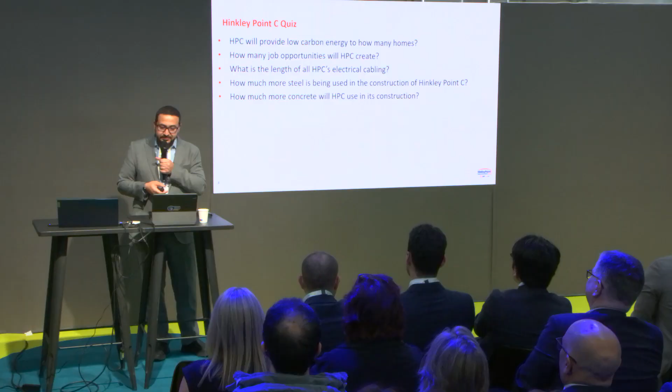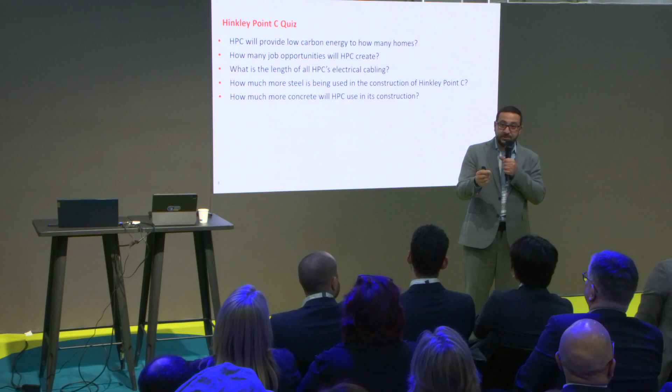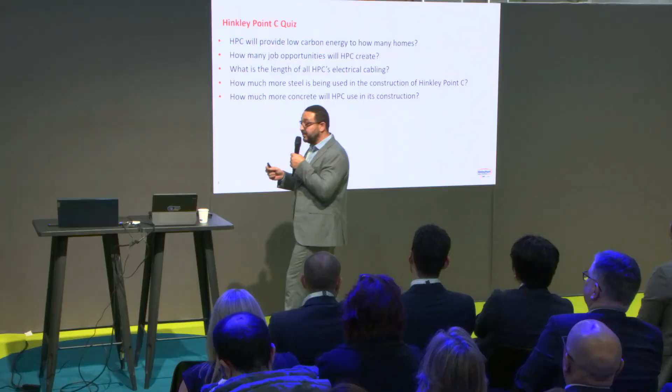And how much more steel is used at Hinkley Point C compared to Flamanville? Anyone want to guess, in percentage? 20% - good guess, close. Maybe while you're thinking I'll explain the reason - with the different regulator, there's different requirements in terms of reinforcement and some slight design changes. In fact, I would classify Hinkley Point C as a first of a kind because there's about 25% difference in design. But the steel, your answer was 20. Any other takers? So 20 was the first answer. 25 is much closer, so it's 35%.

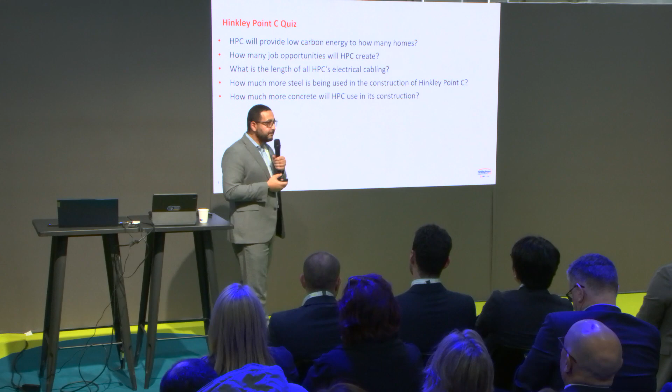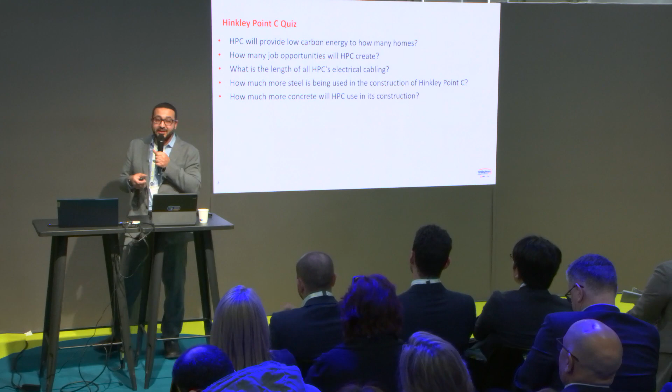35% - so more steel. And how much more concrete will HPC use in construction? Percent will be fine, anyone know? 50%? It's a bit lower - it's about 24%. Thank you for engaging. So it is different, isn't it - Hinkley Point C is different. And different comes with some challenges, but some huge opportunities as well.

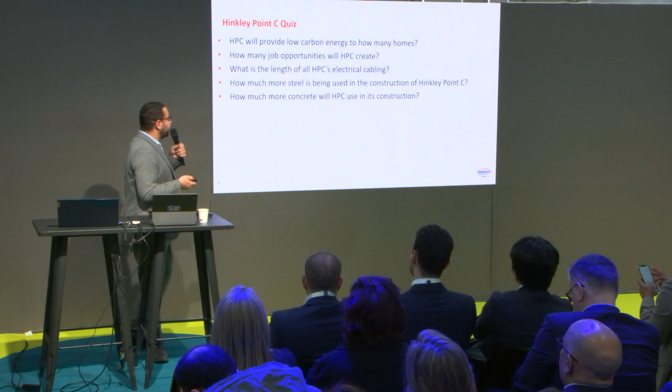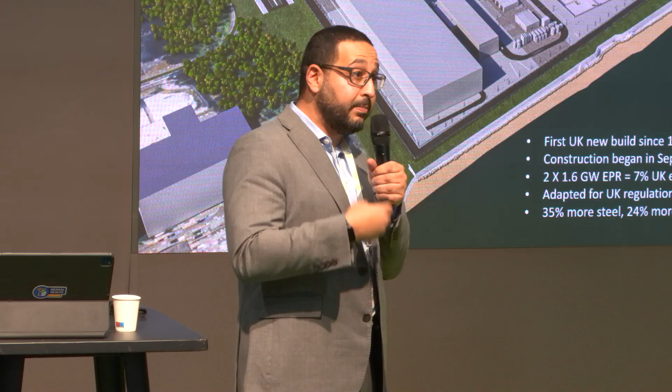Okay, so this is what Hinkley Point C will look like. I'm very much looking forward to it when it's an operational power station, where I feel a bit more comfortable because that's my experience, that's my background, and we'll be making electricity and sending it out. So beautiful looking plant, and there'll be a nice walk here where I plan to walk with the team every now and then, get some fresh air. But it's a very long walk because Hinkley Point C is very big, much bigger than my old stations.

Okay, so construction began in 2016, but the first concrete was 2019, and it's 2 1.6 gigawatt EPRs. Will produce 7% of UK electricity. And you can see the answers on some of the questions. I would consider it a first of a kind as well.

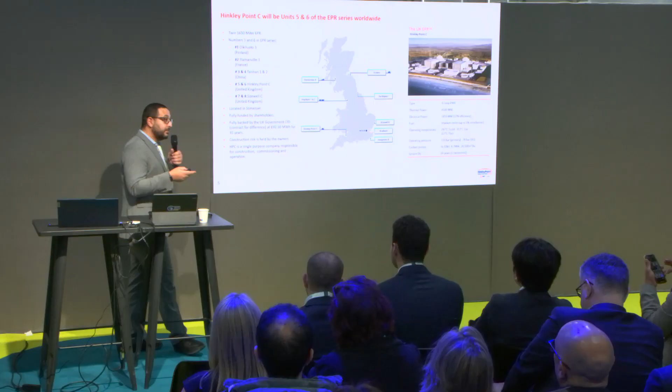Hinkley Point C, we consider it number 5 and 6 of the EPR family: Olkiluoto 3, Flamanville 3, and Taishan 1 and 2. It's hugely beneficial to come a bit later in that sequence, because we can take a lot of learning, but Hinkley Point C also has some differences. So lots of learning for us to take, but some things we're facing for the very first time as we build Hinkley Point C.

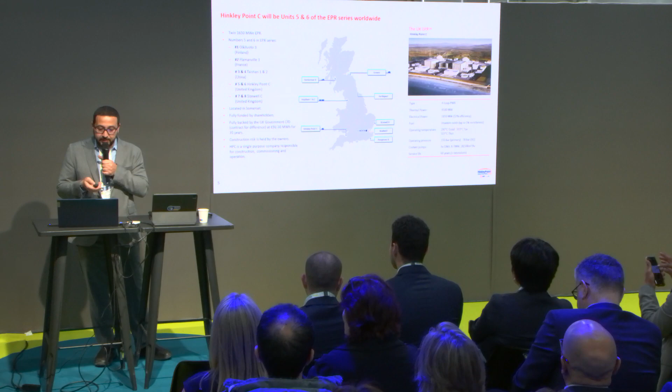I'm going to talk about the delivery model in a little while, but something about the way Hinkley Point C works. I joined Hinkley Point C two years ago from my previous roles. There are over 11,000 people there now, and so many suppliers and partners. We are essentially the customer, but we have to be a very intrusive customer, so we have to be involved in pretty much everything.

That can be quite challenging when you have different suppliers from all over the world with different standards, different ways of working. To be able to ensure there's a common standard, a common way of working, is very challenging. And that's why we created a delivery model, which I'll talk about.

When we embarked on Hinkley Point C in the UK, one of the things worth noting is the last power station built was Sizewell B, and that's the last time we built a power station when we had the infrastructure to build power stations. But since then, we've been quite quiet when it comes to nuclear new build, which means we didn't have, and in fact we are still developing, the capability to build and operate this large power station in the future.

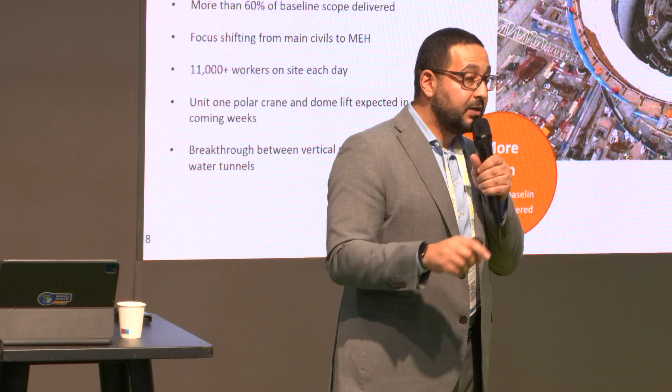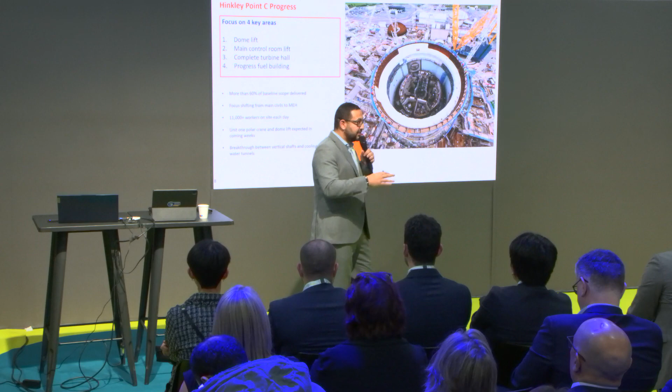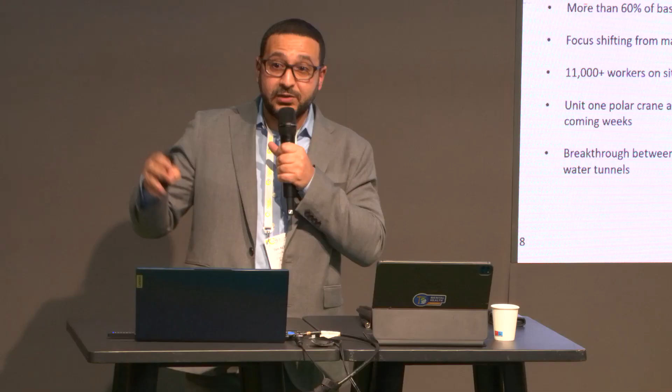The turbine hall - completing it is progressing well, but it won't be complete this year as was one of our targets. It'll be completed early next year, so it's progressing very well. It looks different now - you look at the turbine hall in Unit 1 and you can see a turbine hall. If you've been into operational stations, you can see the structure, the foundations, where the turbine's going to go, where all the motors and pumps are going to go - it looks real. We just have to put some cladding and covers on to finish the turbine hall and allow GE, General Electric, one of our main partners, to come in and progress the installation of the turbine hall. And progressing the fuel building is ongoing.

So today, what would you see? I mean, have any of you been to Hinkley Point C? Yes, that's why you know all the answers? Yeah, quite a few. Okay, some of you work there, I know you, so you don't have to raise your hands.

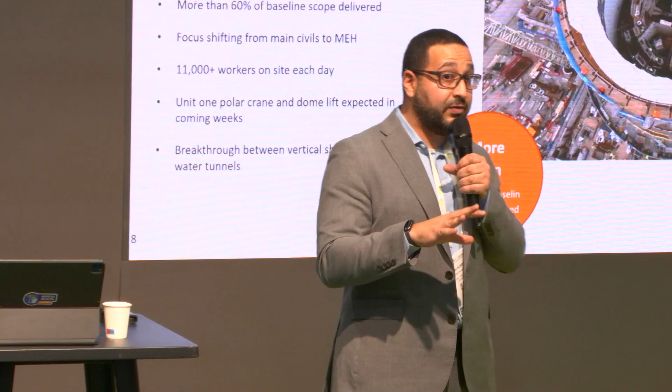So from today, what you would see is, out of the 11,000 people, about 6,000 are civils. So most of the work scope at the moment is civil work.

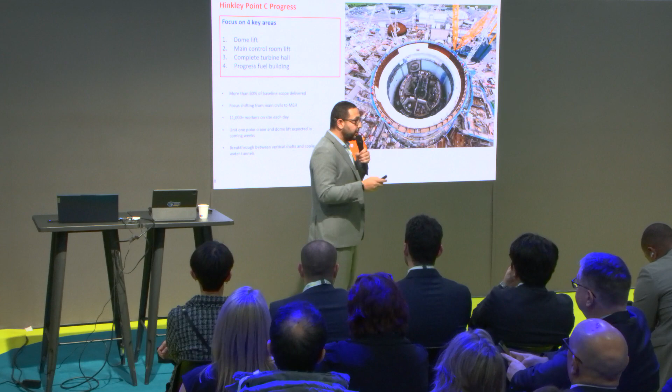So next year is a really interesting year, because there's going to be a shift from civil being the primary activity to the next phase: MEH, mechanical, electrical, HVAC. It's already happening, it's kicked off, but it's a very interesting time, and we've learned from the other EPRs that it's critical to get right.

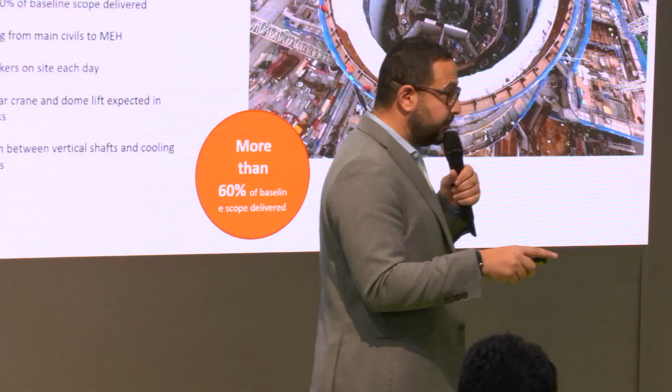How do MEH come and work while civils are still working? How do MEH install while some of my team will be commissioning? Who's in charge? Under which safety standards do we work? Who owns the risk assessment? There's a lot of questions.

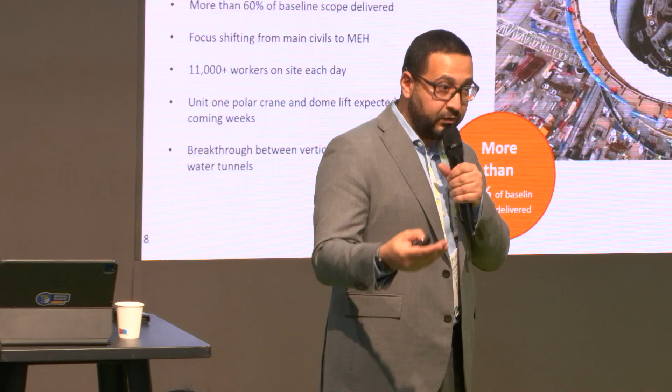Actually, we're very lucky that the other EPRs have shared very openly with us some of these challenges, and we've taken that on board in how we've written our processes. Now we have a very collaborative model, which I'll talk about in terms of how we deliver work.

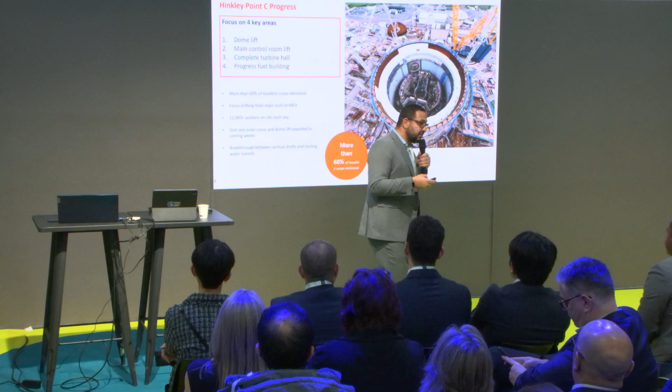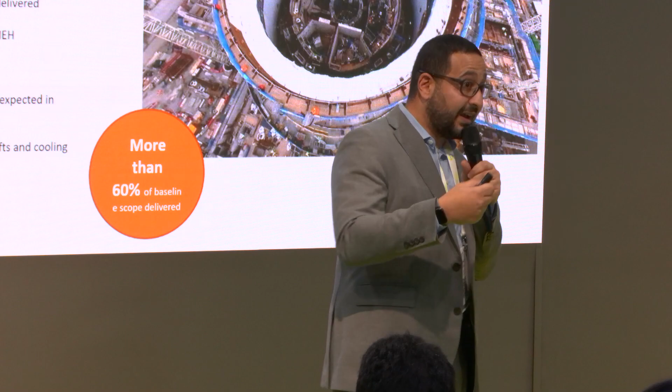So MEH will pick up quite heavily next year. We expect the number of people working on site to go up to about 12,500, which was not the original plan, but we have a lot of work to do, so we're increasing the number of people. We've been quite successful in attracting people from around the world, as well as developing people in Britain, so we're going to use that additional capability.

Okay, the polar crane I'm going to cover in a minute - I'll show you a picture of it. I walked it down last week. Before we put the dome on, we want to put the crane in from the top because it's very big.

If any of you have been to the EDF stand, you're able to use virtual reality - I did this morning to see Flamanville 3. When you do that you'll see the polar crane, it's huge. I was very keen to see it in position because the polar crane at Hinkley is in a big tent at the moment, being finalized before we lift it into the permanent location in the reactor. It's in a purpose-built tent that keeps it safe and preserved while we finish the bolts and fasteners before we lift it into final position.

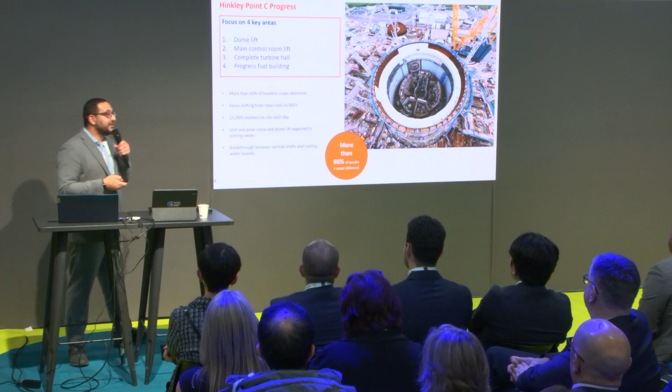Okay, I'm going to move us forward. So yes, the overall progress, we are 60% complete overall, and we have a very ambitious schedule, especially being the first of a kind.

But it's great for driving people to be creative and really consider that a lot of things won't work the first time. So we have to be ready and have the backup ready, just like we did with our quiz. That's what we're doing at Hinkley Point C. We're getting better at it. Are we perfect? Absolutely not.

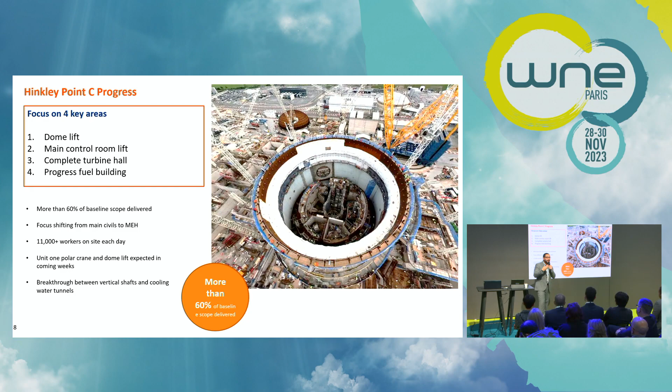Have we got some benefits? Yes, because we've had some really good operating experience from the other EPRs. Our 96-month schedule is what we're working to, but there are some challenges to that, is the truth, and we're working through them as best as we can to minimize any delays.

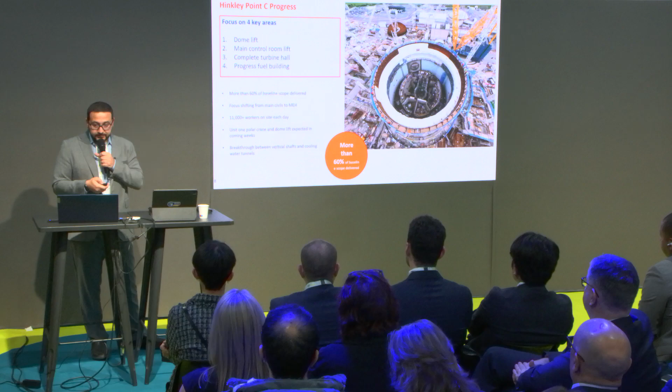Okay, I'm going to show you a video - let's hope the audio works okay. Are you ready? This is the latest video, it's a few months old, but you'll see the next one with the dome on probably in a couple of months. Things haven't changed at the top level too much.

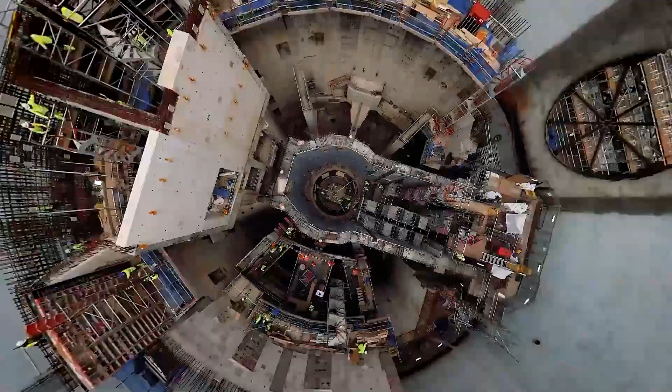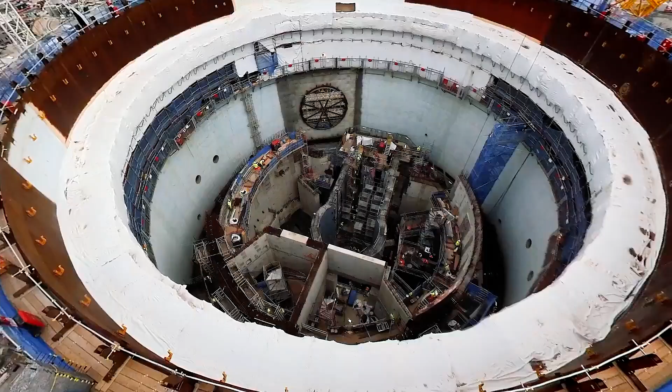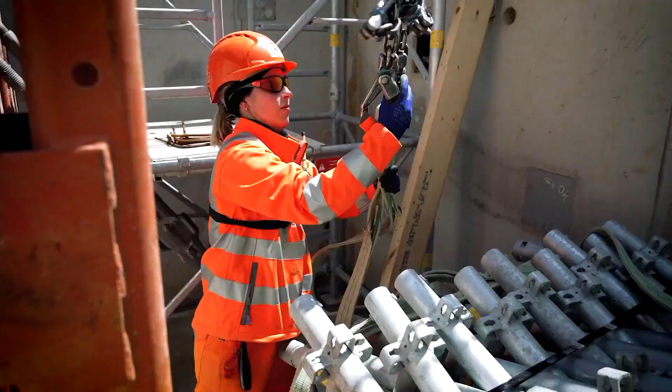Welcome to Hinkley Point C, where we're building Britain's first nuclear power station in more than 30 years. Night and day, it'll power 6 million homes and will be crucial in helping us achieve net zero and stronger energy security. Right now, we're busy working towards a really big milestone in the project's construction. Let's go and find out more.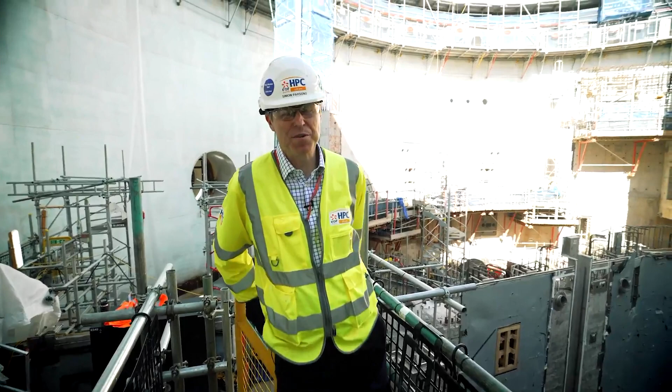Welcome to the heart of the first reactor building. The teams are getting ready to lift the 245-ton steel dome on top of the building. It will be a spectacular sight and a significant milestone for the project.

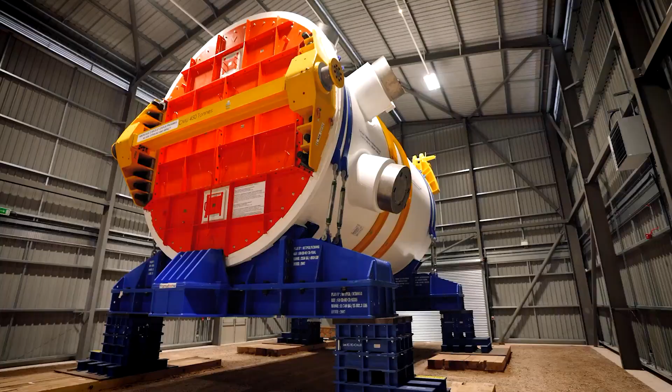Below me, we have installed the support ring, which will hold the reactor in place. The reactor arrived on site early this year and will be installed next year. You can see we poured the concrete around the big prefabricated pool, which will be home to the reactor for its operational life.

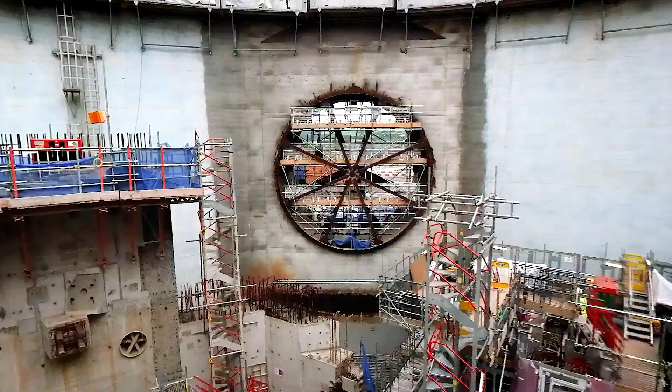Next, we'll fit the huge equipment hatch, which will be installed on this opening behind me. It will open and close, allowing equipment to be moved into the reactor building during construction and operation.

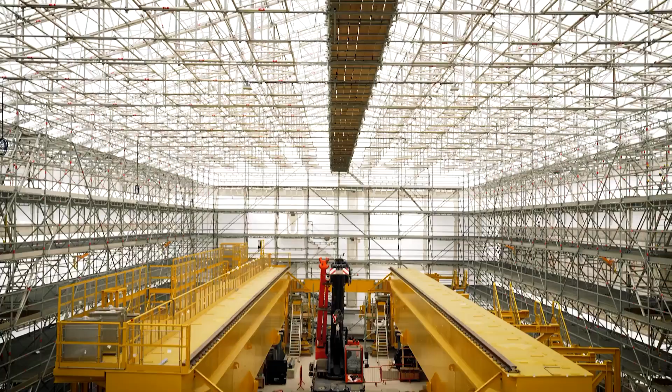In the coming months, we'll put the polar crane on the brackets which are being prepared above me. It's a huge rotating crane that will sit under the dome. It's under construction here on site and will be lifted in one giant piece. All these elements have to be completed before we can lift the dome, which is just over there.

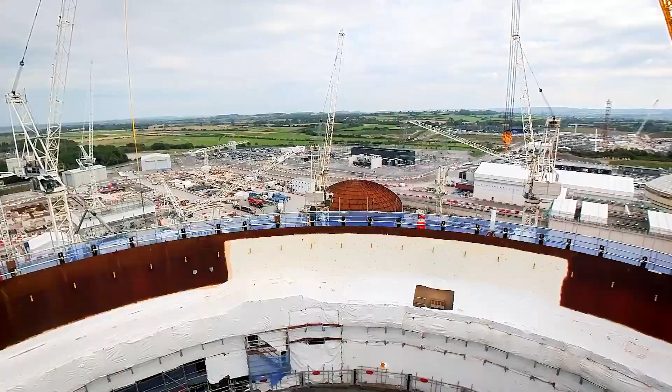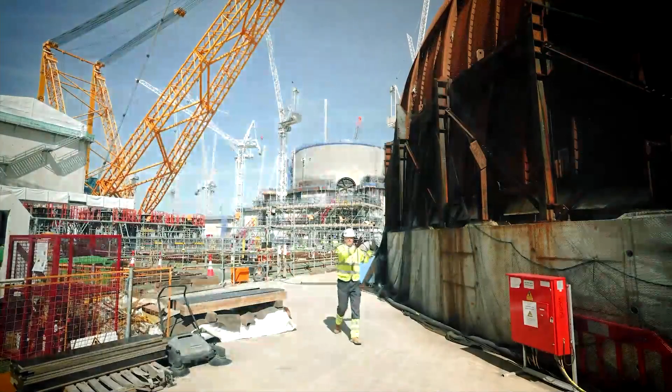We're here at the dome, where we're making the final preparations before the dome will be lifted into place later this year. Let's go and take a look.

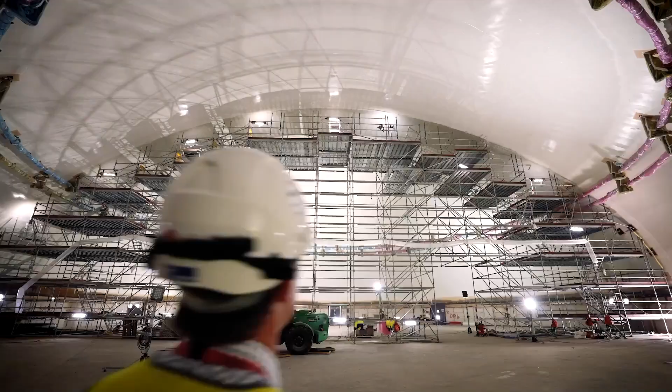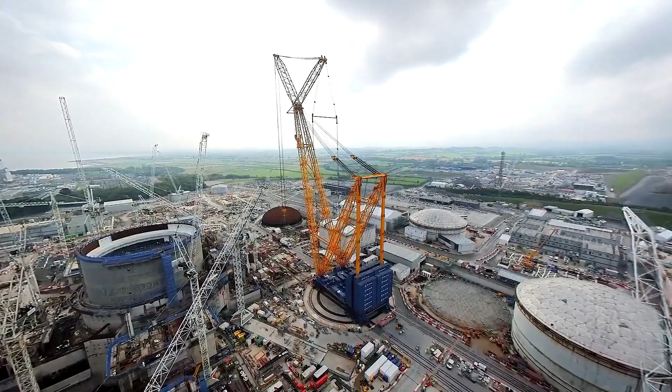Wow, look around. We're now under the dome itself. We've spent a lot of time working on the steel structure, carrying out the manufacturing, welding, coating, and services installation and testing. And in just a few months, it'll be lifted on top of Unit 1 by Big Carl, the world's largest land-based crane. There's a real sense of anticipation and excitement, and we've been building for this moment since the project began.

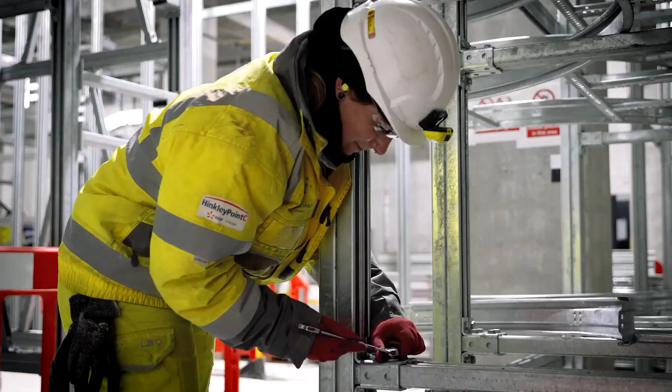Once the dome is lifted, the first reactor building will be weatherproof, so our mechanical and electrical teams can really get to work on installing the pipes, the equipment, and the cables.

We'll also start introducing the big nuclear components, like our steam generators, which have finished initial testing at Framatome in France. Now, all these components need to be controlled from one central point.

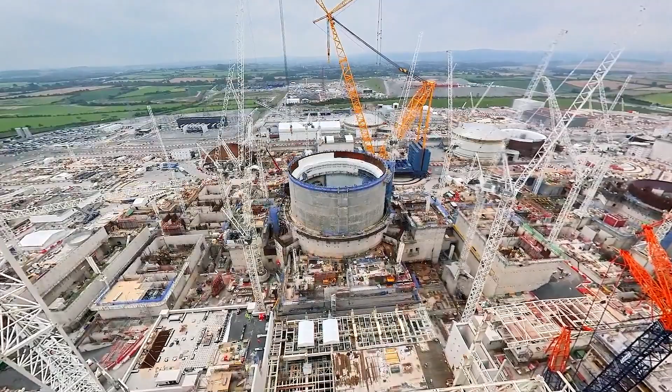And that central point is our main control room, and it will be installed right here on this concrete slab. We're busily finishing the walls that will sit around the main control room, but it won't be long before it'll look just like this. Our trainee reactor operators are already using the simulator, which is an exact replica of what the control room will eventually look like.

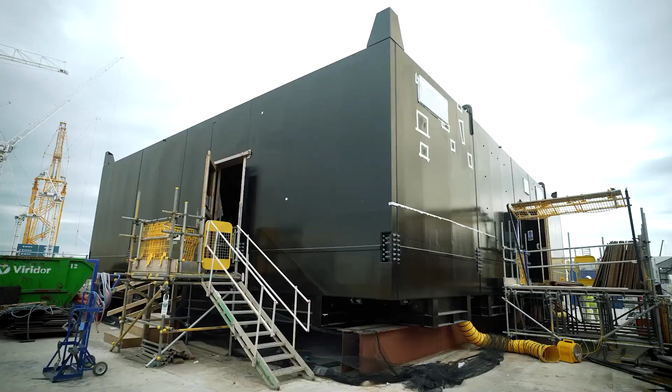The actual control room is on the other side of the site and will be lifted to where I'm standing before Christmas and then fitted out. It will control the reactor building and also the power generation in the turbine hall.

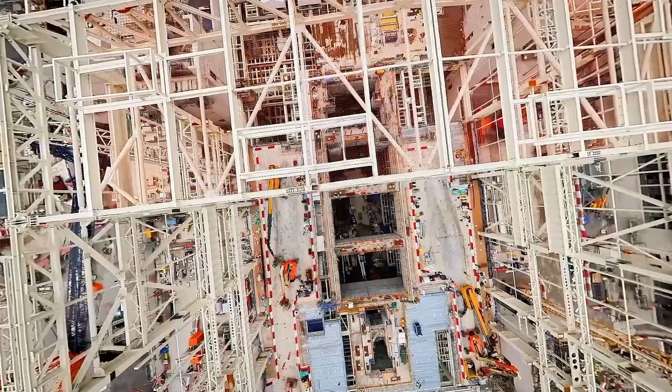Unit 1's turbine hall is really taking shape. Right here, we'll install the world's largest steam turbine, the Arabelle, made by our colleagues at General Electric. The turbine will generate electricity using steam generated from the heat in the reactors. These huge white structures above my head are the roof trusses, taking the hall to its full 50-metre height.

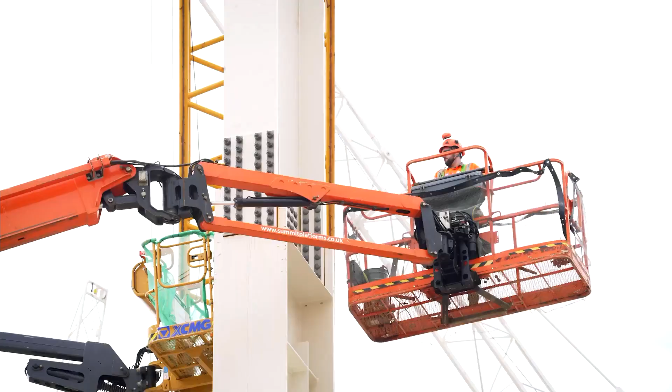We're now gearing up to install the 300-ton crane. It's under construction in Avonmouth and will be used to install and maintain the equipment in the turbine hall. So that's above ground. Now let's go underground.

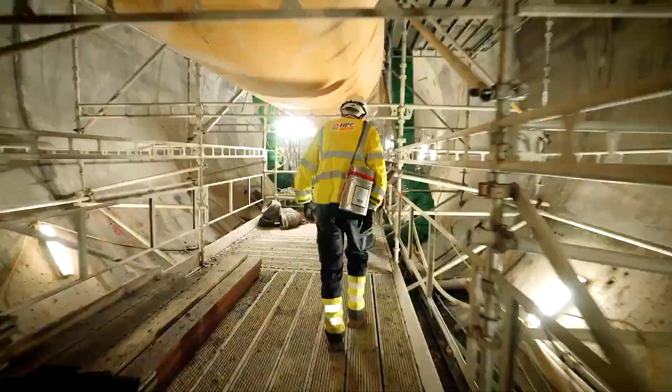I'm now on my way out to the end of the tunnel, which will return water to the Bristol Channel, more than a mile out to sea. It's big enough to take a train and is one of 3 tunnels which will circulate our cooling water.

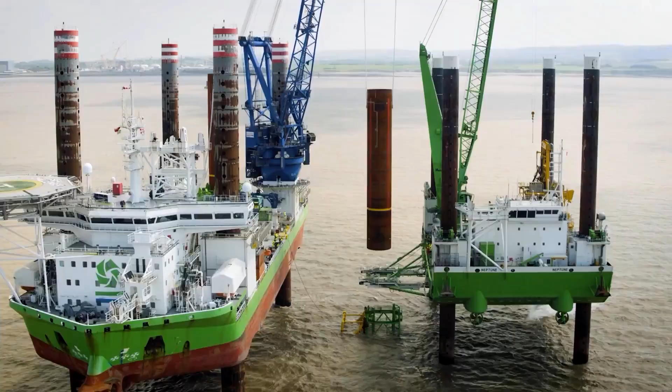I'm right at the end of the outfall tunnel, where 23 metres above us, 2 huge jack-up vessels are drilling down through the seabed. This summer, they installed 6 giant steel casings to form shafts. We'll join it with the tunnels down here, and we'll dig out to make the connection. It's some of the most complex work in our entire project.

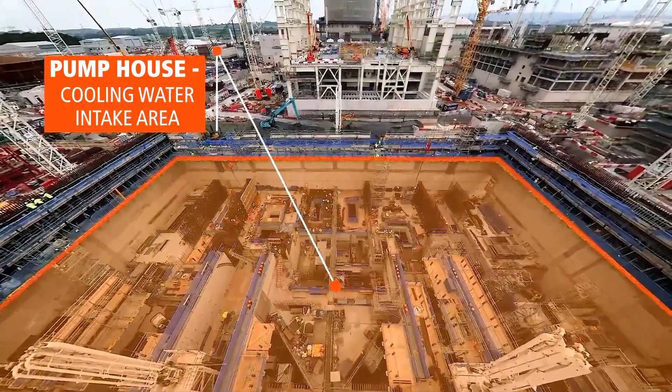Back here on shore, the pump house is progressing really well. Civil works are now 2/3 complete, and the mechanical and electrical works are underway. Now let's go and check out one of my favourite views of the site.

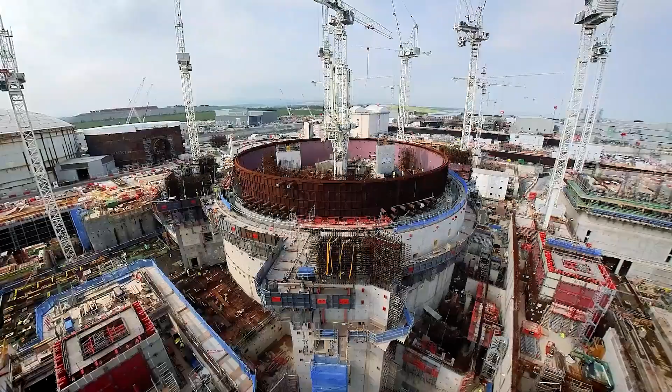From here you have a great view of Unit 2, our second reactor. After slowing down during the pandemic, work is progressing well here, particularly on the concrete inner and outer containment structures on the reactor building. And it means we'll be ready to install the second steel inner ring later this year.

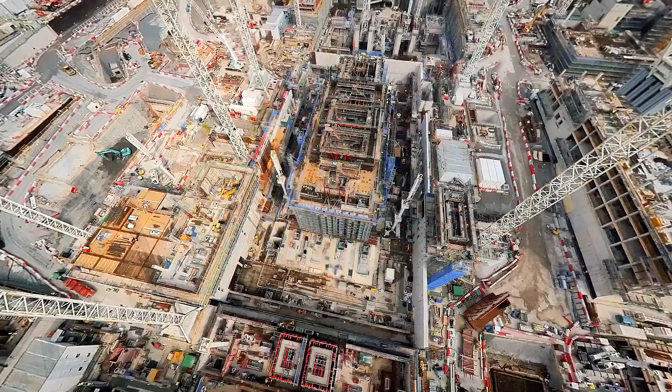Construction of the whole of Unit 2 and its systems is really benefiting from the lessons learned over at Unit 1. Many tasks are achieved in 20 to 30% less time than on Unit 1. That replication principle underpins our plans to build an identical power station at Sizewell in Suffolk.

And that's it for our latest tour. I am so proud of the people working here on site and the thousands of people working on this project right across the world. Next time you're here, the dome will be on Unit 1 and the site will have transformed again. More of our mechanical and electrical work will be underway, and we'll be installing and testing more equipment so that it's ready when the power station becomes operational.

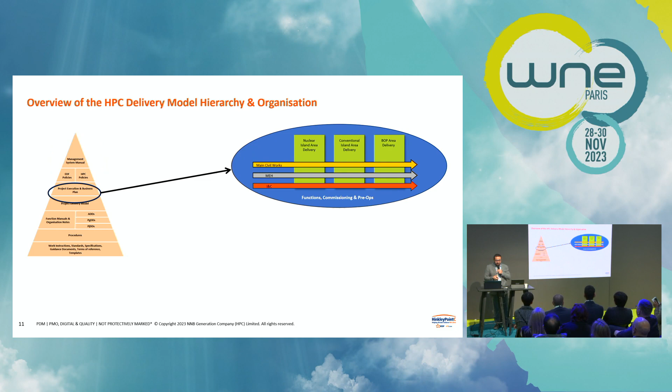Okay, so don't worry about the text, I'm going to just jump through and talk to you about a few things. So we have a process just to make sure that we are consistent and clear. We have something that sets the overall governance and direction, but the key one I want to focus on is this.

So to achieve a really straightforward delivery model, what we needed was people to be in charge. We have so many different programs, including civil, MEH, I&C, commissioning, and other programs, digital. But we wanted people for a specific area to be responsible and accountable. And that's why you saw Simon Parsons before - Simon is the nuclear island area director. That means anything in the nuclear island is in his area, in his decision-making, his accountability, his responsibility.

So for example, if Simon wants a certain civil structure done at a certain time - for example, to install the polar crane that he talked about - we need a certain structure in place. Simon would go to the civil team, the civil director, and say, this is when I need the civil structure done to this standard. So the concept is the area directorate - each area will be able to pull on and essentially require the support that they define from all the other programs and areas. So essentially one person is ultimately accountable for the delivery of the scope in that area, and everyone else is on the transverse side - civils, MEH, I&C are supporting that delivery.

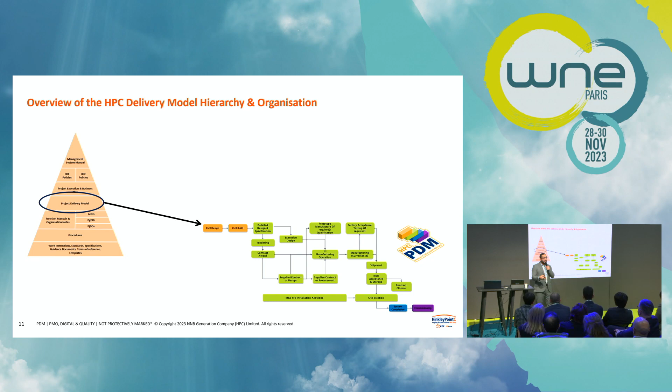So the technical director, the technical team, identified a gap, because they're part of the customer, part of the client. The technical team then went to the area responsible. So in the case of this kit, it was the nuclear island, and said this doesn't meet the requirement. The area then said, okay, tell me how we can make it meet the requirement.

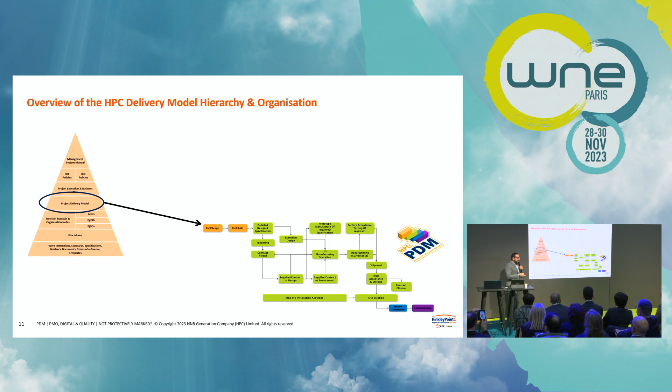Okay, I'm going to move us forward because of time, and talk about what underpins our delivery model. What underpins it? Again, you've probably seen a lot of stands about digital.

So if you imagine a world, if you're like me, you've worked with procedures, hard documents all your life. That's what I've done. Then you go to a data-centric world where instead of having a procedure that tells you what to do, you have the data in a big database that's very intelligent, that's able to adapt based on your progress. So in the good old days when I was operating power stations, I have a procedure, I do a test, and then something happens that I have to do differently, or someone calls me for a higher priority job. I have to go back and restart from where I was, checking where I was in the procedure.

Well, in commissioning, in operations, in construction, things don't go to plan. You have to adapt. Having a data-centric approach allows us to be more agile, because you update the data and then the tool tells you what bits are outstanding. So it's not going through a bunch of procedures, rereading the procedure, making mistakes. That's when mistakes are made, when things don't go exactly to plan.

So this data-centric approach, I would love to talk about it more, but maybe we can do it in the Q&A, it's really, really powerful. There is a problem: not all suppliers are data-centric at the moment. That's just the world we live in. We have to encourage that data-centric approach, and for some people it's hard, very hard to do and costly. But that's the principle of our digital tools that will help us going forward.

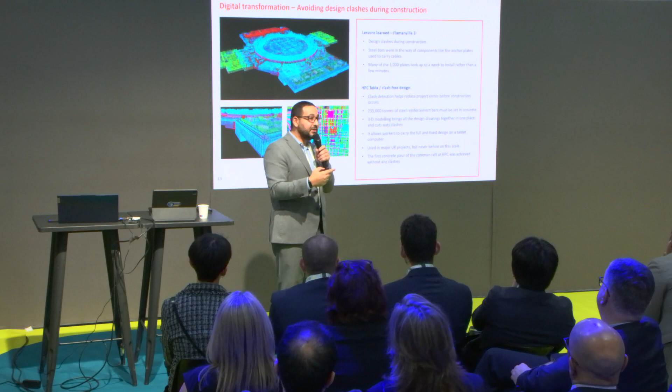Okay, 3D modeling. Again, from the operating experience, there were some issues in construction of all the EPRs, as there are with all the other nuclear power stations. One of them was physical conflicts, where a bit of pipe or a bit of support is hitting something else. It sounds basic, but with a very complex power station, it's very easy to have a bunch of clashes. I see a few people nodding - it does happen quite a lot.

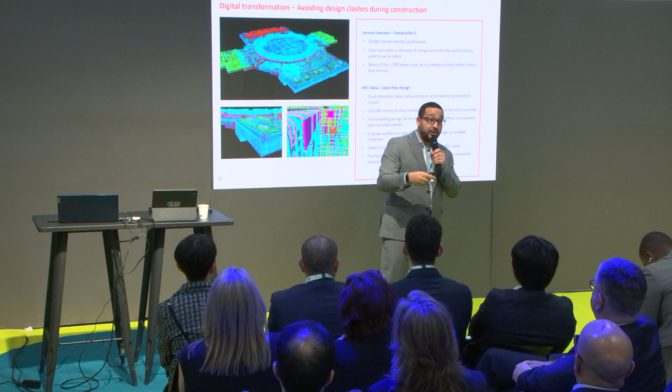So with the 3D model, our teams are able to take a tablet with them when they're out, and they're able to see what it's going to look like, what's going to clash with what, and it reduces the likelihood of rework, the need to redo things and reassess things. Okay, I'm going to skip this for time.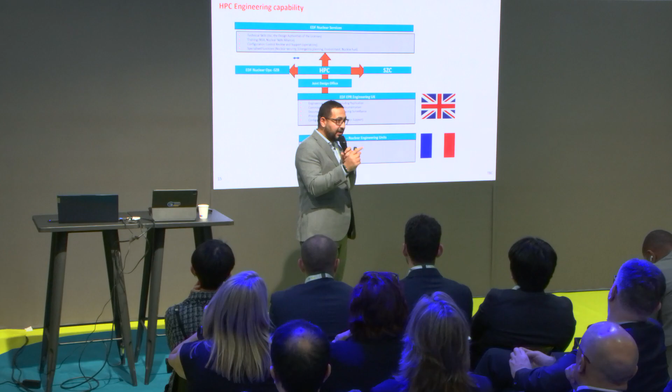So here, I'm just going to bring out one point. I gave the example of the polar crane, a bit of kit in Nuclear Island where things weren't exactly as we expected, and how we fixed it. But the key bit is we have the engineering or technical team, and a joint design office which has embedded people from the design team, from the French designer, embedded there to have this agile response.

So imagine, you know, I know the power of distance - if people are far away, it tends to be a bit less efficient. So actually having the joint design office on site with the designers, who are generally based in France, embedded, is quite powerful.

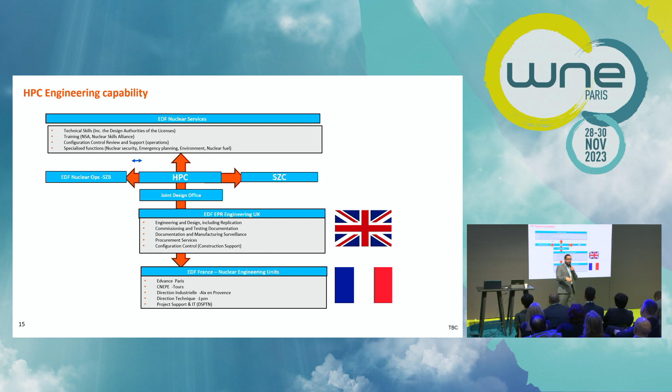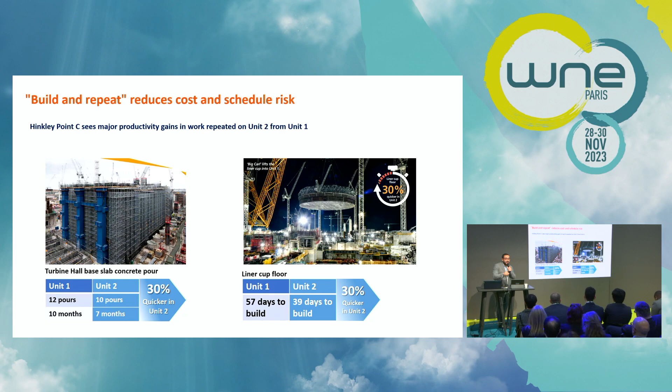It's very natural, it's instinct - people learn things and adapt how they do work. So that's very positive. Imagine if we take that further into Sizewell C, Unit 1 and 2, it'd be great.

Okay, a few things about modularization, which we learned from Flamanville and Olkiluoto. And I'm going to stop there.